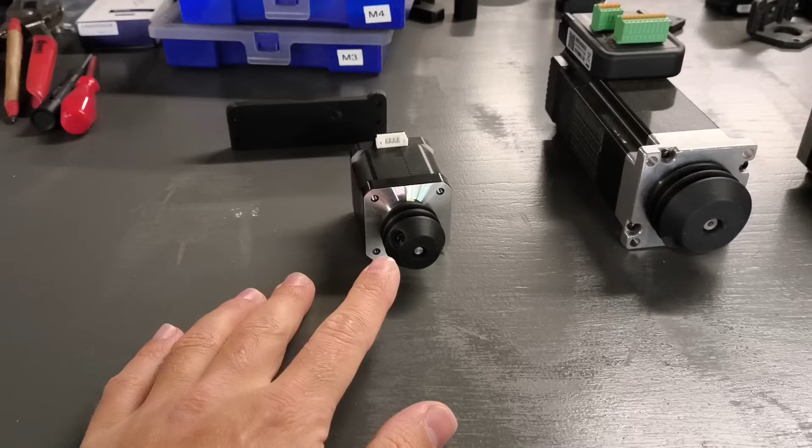This is what we started out with. It's a NEMA 17 with a 25mm effective diameter pulley on it. This is a NEMA 23 style servo in this case because the stepper motors are put on the machine with a 40mm pulley. And what we found out in the latest episode is that those weren't really scaling with the current I put on there. The reachable amount of acceleration wasn't going up linearly when I increased the current.

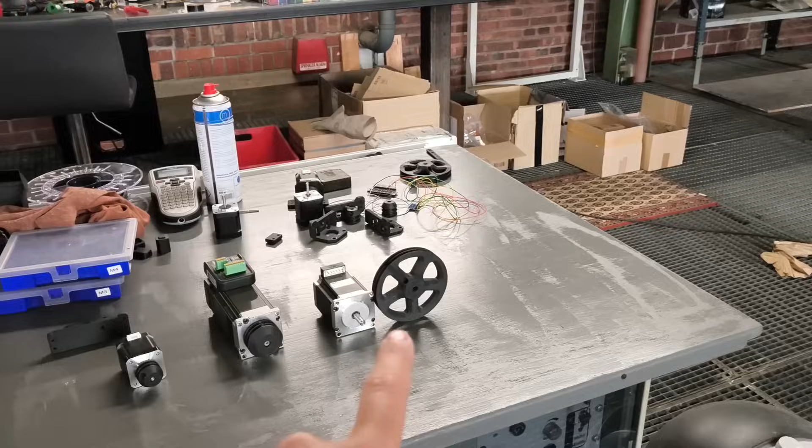So today we're doing the natural thing, and as loads of people suggested in the comments, we're putting on bigger diameter pulleys. This is a 100mm pulley, and on the machine I already have the 120mm and the 80mm version on here. We're going to run some tests with all of these, have this one as an intermediate step to put on there. And then, right now, we're running the OMC steppers.

It's upside down, but you can see if this is of any interest to you. 3 Newton meters, 4.2 amps, NEMA 23 style steppers.

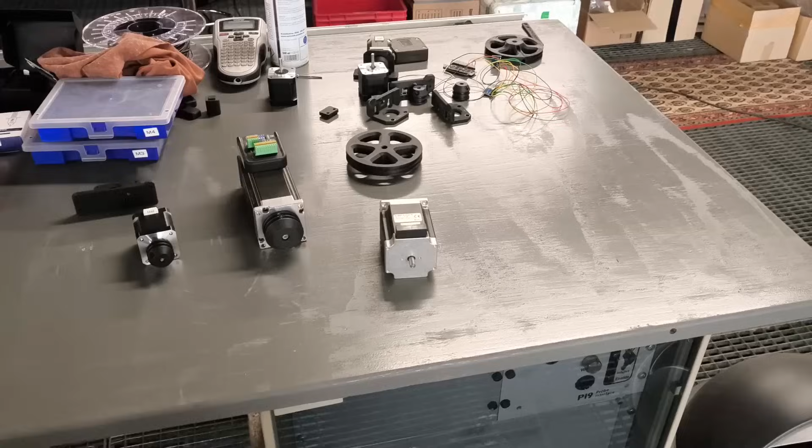Today, we're also having a look at a different motor. This is something a company from Munich sent me. It is also a NEMA 23 stepper motor that can also handle 4.2 amps and also has around 3 Newton meters of holding torque. We're gonna have a closer look at what makes this so special and gonna throw it on the machine and see if this enables us to reach our limits.

So I guess it's time to play the intro tape and then get straight into testing maximum accelerations on all these different setups. So let's go.

Alright, we're on the Minuteman machine and we're gonna do some testing now. Essentially what we're trying to find out is the maximum reachable acceleration per given current on the coils. This is just doing a straight line movement back and forth like 5 times at 1500 millimeters per second printing speed, and with each step it's going to increase the acceleration by 10k. I think the maximum I've set up here is 600k, and let's hope we have to dial that up today.

I set up this crude looking table here and we're going to fill in some blanks. This is like the 80mm pulley, and I think 4 amps per motor is what my current supply is capable of doing. Let's start with the 120mm, I guess, and the test is gonna look like this.

Hit cycle start. 10k, 20k, 30k. This is 1 amp per phase.

And as you can see, it did the 100k, so I have to go to the next step file. I'm gonna cut these tests because there will be loads of missed steps, etc., and me setting up everything again. Let's get back to the graphs, and maybe I put in some of the highest value movements I can achieve. So see you again in a minute.

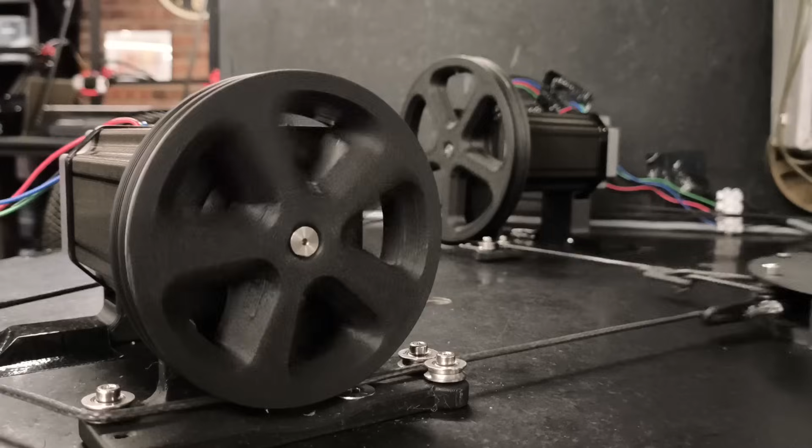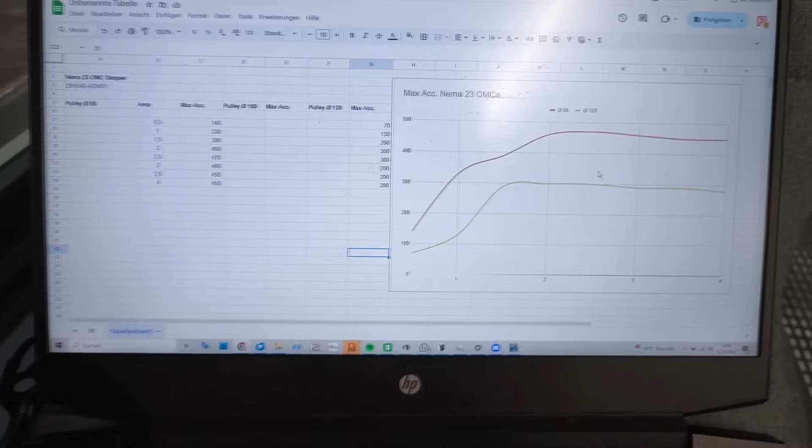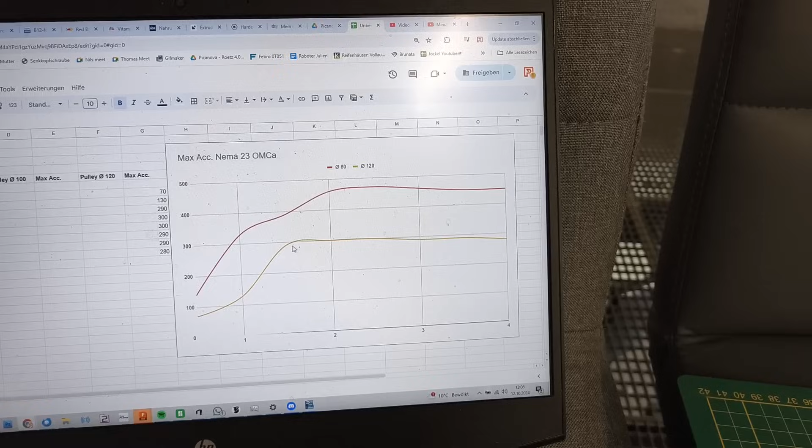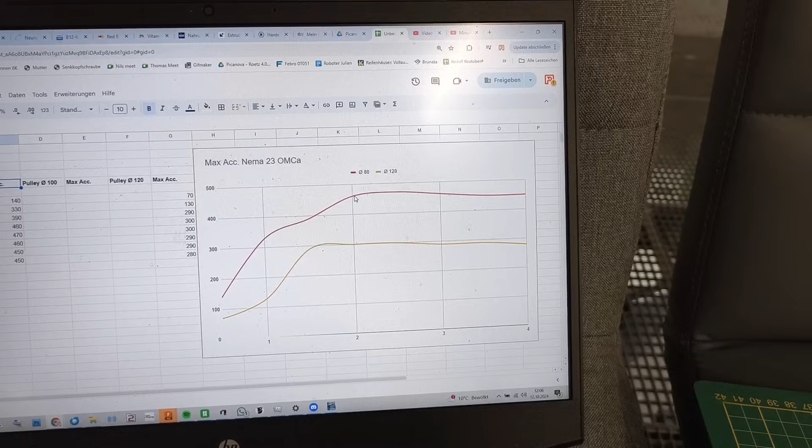So we got some first results in. These are the values I could find, these are the corresponding amperages, and these are the maximum accelerations. As you can see here, that's quite interesting. The 80mm is on top, and you can see in both versions that it is somewhat climbing linearly to a certain point. With the 80mm pulley, that's around 2 amps, and with the 120mm, it's somewhere around 1.5 amps. I can reach accelerations of like 300k, or in this case 470k. Then from this point on, it's just slightly dropping off.

So this is kind of the same as the results I got the last time when we ran the initial 40mm pulleys. We got the maximum acceleration at like 1 amp, and from this point on it was just getting wilder in terms of stress put into the system, but it actually didn't increase our maximum acceleration.

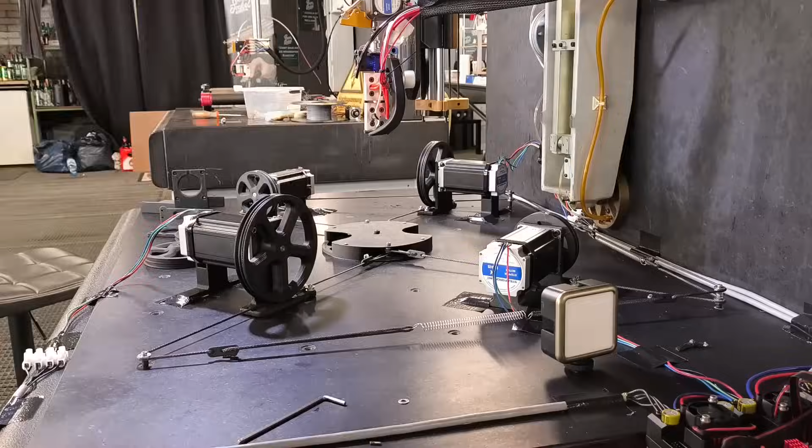That took me way longer than I thought it would, but yeah, I got some results for the 100mm diameter pulley. There's so many little things to dial in before I can actually do testing with proper results.

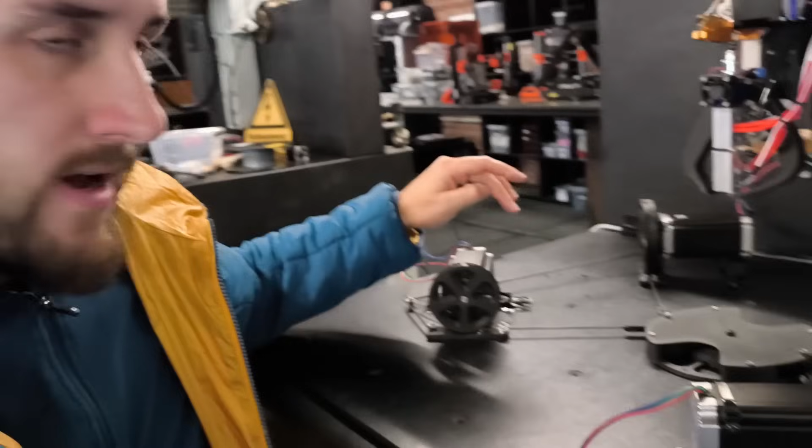In this particular case, I realized that this motor is bad. If I would care to know, I would slice this open and see what the problem is. Maybe it has got something to do with the load on these bearings. Maybe these guys aren't really designed to do this kind of task without having a proper secondary bearing up here.

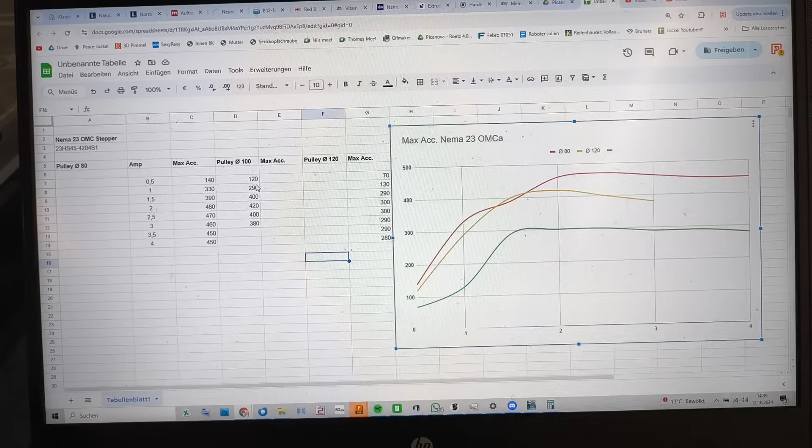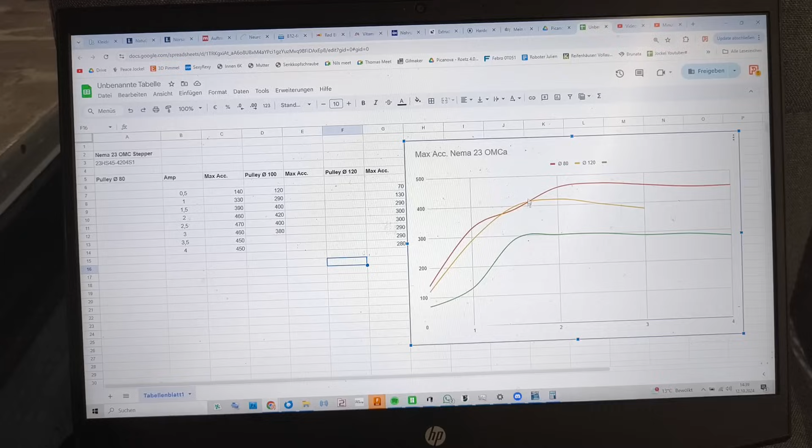I try to keep everything else consistent in terms of microstepping, cable length, rotation diameter, etc. No other parameter is changed except for the amperage. As you can see, up to this point it's pretty much on par, and then it settles in and also tapers off a bit at the end, like we see with all the other pulley sizes. So our sweet spot seems to be somewhere in the neighborhood of 1.5 amps of current.

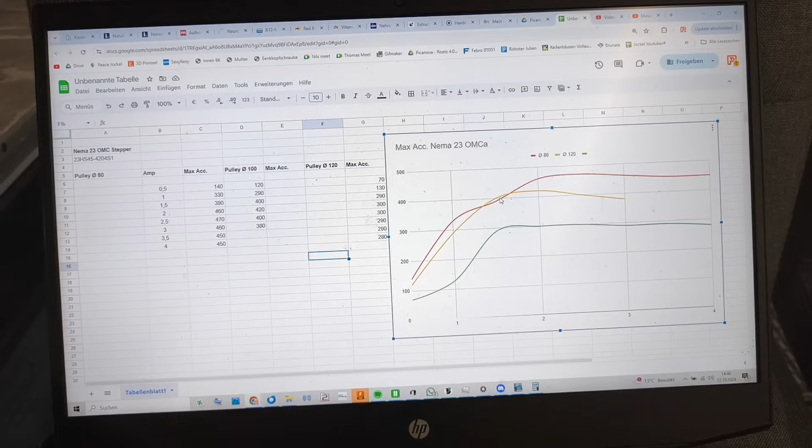The 80mm diameter gave us the best results. That's kind of interesting. I wasn't really expecting that when I did some simulations on here.

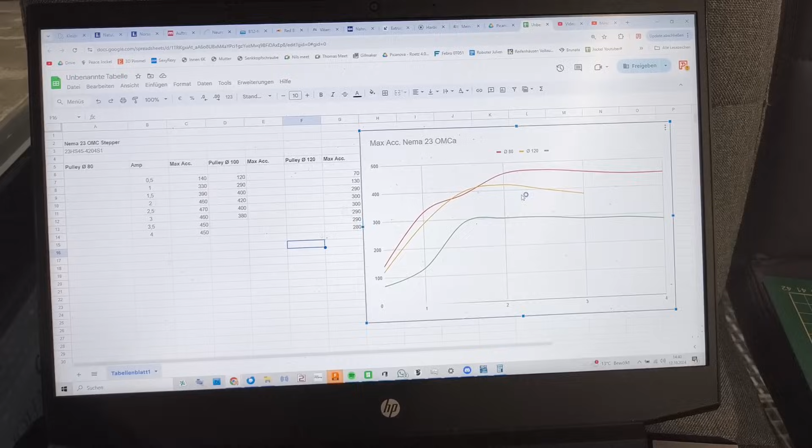But for now, I think it's time to have a look at a different motor, because these OMCs were great for first testing purposes. They were really easy to obtain, I had just 2 days of delivery time, and they were dirt cheap - 25 euros a piece. It got me started in finding out if NEMA 23 is the right form factor for this machine.

At the end of the last video, I also gave a shout out to anyone knowing a company or technology using stepper motors that would help us reach our goals. A guy named Andre called me up and said he is working on a quite similar project, and I think you will see that in some future episodes. We're not clear on the details, but he gave me the name of a company here in Munich called Nanotec. I wrote them an email and asked about doing a collaboration on this project.

They sent me some top-of-the-line stepper motors. We had a quick call about what they expect the results to be. They won't guarantee any value or something, but they were pretty interested in finding out how they compare to the OMC stepper. Let's put some values together and see you in a minute.

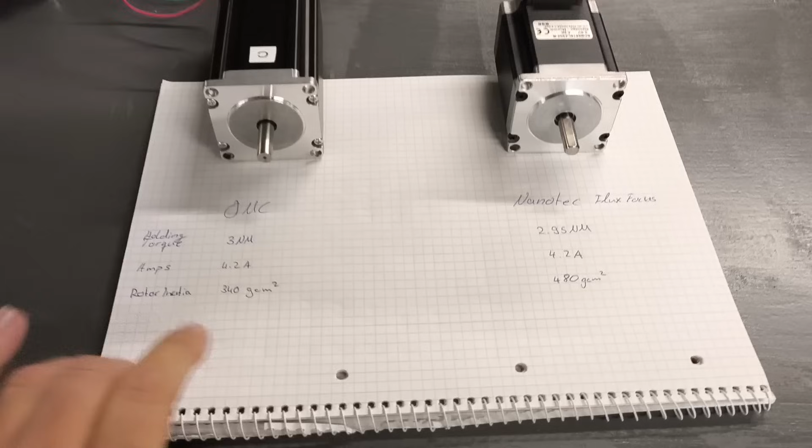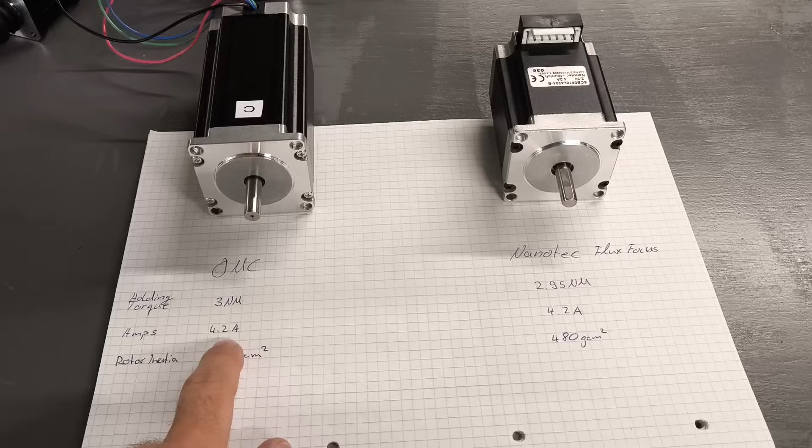So I got the 2 motors lined up on the bench here, and let's just compare 3 little key facts. Both are rated at around 3 Newton meters of holding torque, and they each can handle 4.2 amps of rated current. The rotor inertias are lower on the OMC one.

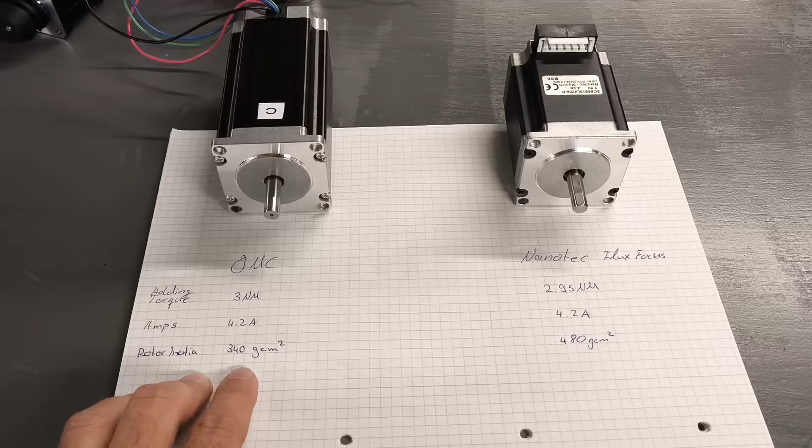Which is usually the better thing for us, because it would allow us to gain more acceleration with less torque. That's 340 grams. The Nanotec is at around 480 grams.

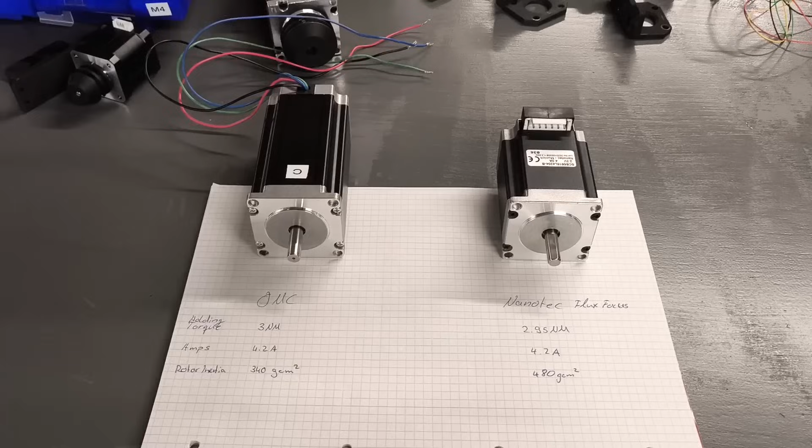So without going into any further details on the spec sheets, this is their top-of-the-line stepper motor with FluxFocus technology. What I can give you, somewhere in the video description there will be a link to the website where you can get all the additional details about this.

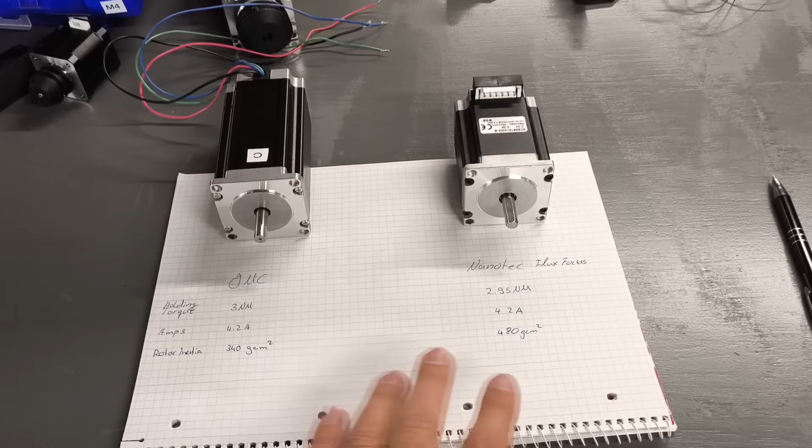It basically boils down to this being a very efficient stepper. As my understanding of it is, they have additional permanent magnets sitting on the teeth of the stator, and that allows them to get the maximum out of every amp of current they throw at it. That makes them really efficient in terms of torque.

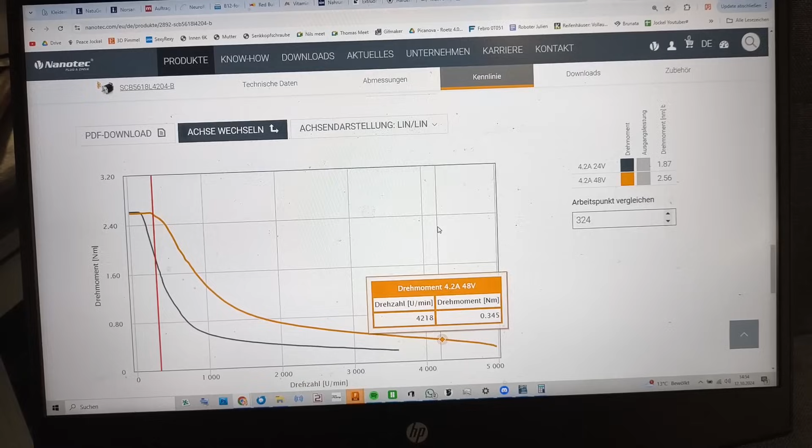So these are the torque curves in relation to the speed. You can see the blue line is at 24 volts and this is at 48 volts. So basically you have to extrapolate a bit to get up to like 57 volts, which I'm running them at right now.

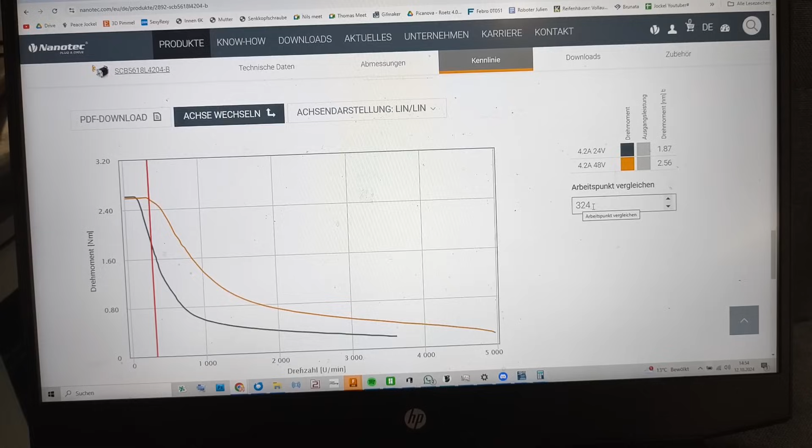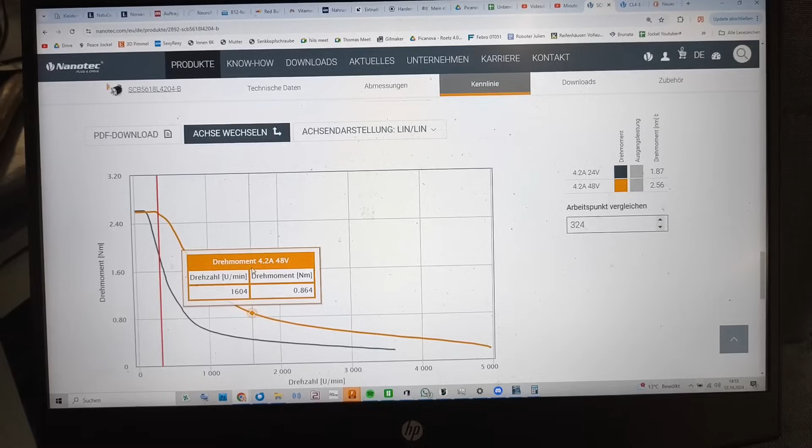With the pulley size of 80 millimeters at 1500 millimeters per second printing speed, it's right about this 325 RPM we're using them at. Yeah, and judging by their document, this stepper should have full torque available at our rated speed.

We'll see what all this black magic in here does in terms of reachable accelerations. Let me slap all four of them on the machine. Then we have one axis with an 80 millimeter pulley and one with the 100 millimeter pulley. Let's see if those numbers add up with the OMC steppers, and then we'll make a decision on what the final pulley diameter will be, and do a test run afterwards to see how that translates into benchy times. Let's go.

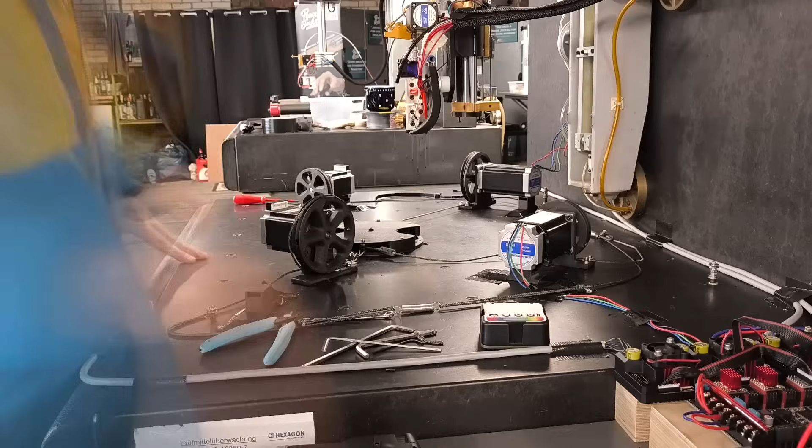I got the Nanotec motors installed, 80 millimeter, 100 millimeter diameter pulley. One thing I forgot to mention, though it was pretty obvious: those motors, even though they're rated kind of the same, are considerably smaller. This is a 76 millimeter length, while the OMCs are about 110 mil in length. Also, they're equipped with a dual shaft sticking out at both ends, because usually this is equipped with an encoder, used in closed loop applications.

Alright, so let's run the same tests. I'll put a snippet of somewhere in the middle, and then we'll see the results. So this is with the Nanotec motors running at 2.5 amps right now on the y-axis with the 80 millimeter pulley, and this is the sweep from 400 to 500k accelerations.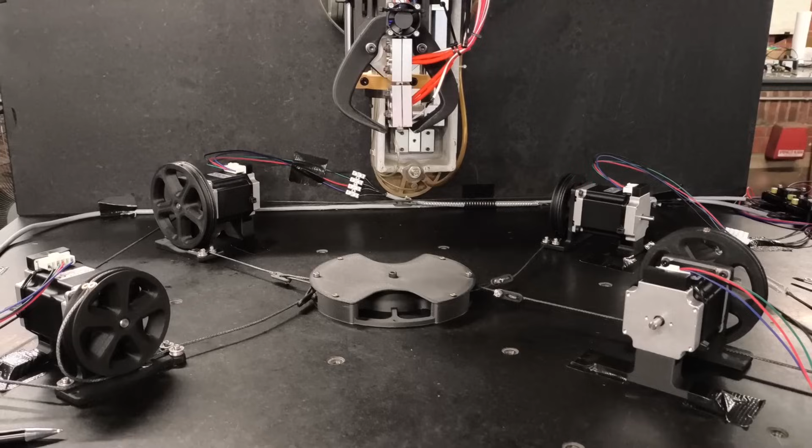Okay, let's just continue. 500k start. 520k it did successfully. Alright, we're back at my screen.

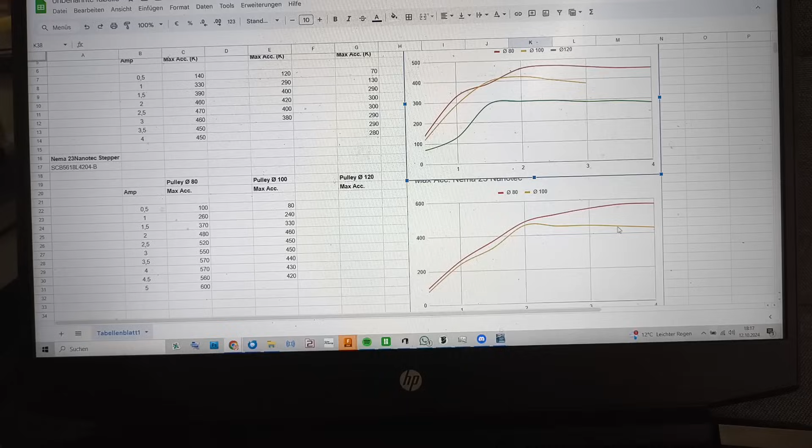So here are the results without further ado. As you can see, the red line represents the 80 millimeter, the yellow line the 100 millimeter pulley. This is a bit different than what we had before, because you can see it isn't flattening out and then decreasing. In the case of the 80 millimeter pulley, it's still able to increase its performance with added current. With the 100 millimeter pulley, it's doing the exact same behavior.

It's been a pretty long day. I've been here for 8 hours fiddling around with this machine, and I'm pretty tired for today. So I think I'm just going to leave it as is, get the CAD work done for the 60mm version, put it on the printer, and see when I get the next time slot available for working here.

Different day, same topic, so follow me to the machine. So what you can see here is I've upgraded the x-axis in this case to the bespoke 60mm diameter pulley, and I've been conducting some tests, and those were pretty interesting.

So again, screen share. You can see the green line up here is climbing and climbing and climbing, and it got to 3.5 amps. I ran these tests 3 times, and it was just shy of 900k acceleration values. Also, these tests turned out to be pretty consistent. I did all of them 3 times and it was pretty much spot on.

So you think, hey, why don't you keep on doing it? The thing is, I can't even reproduce the 3.5 amps. That's quite interesting, because either the motors are quite hot right now, so I have to cool them down for a minute and see if that changes their performance, or if it's something else. I've been keeping all the other parameters the same throughout the whole test, as I said before.

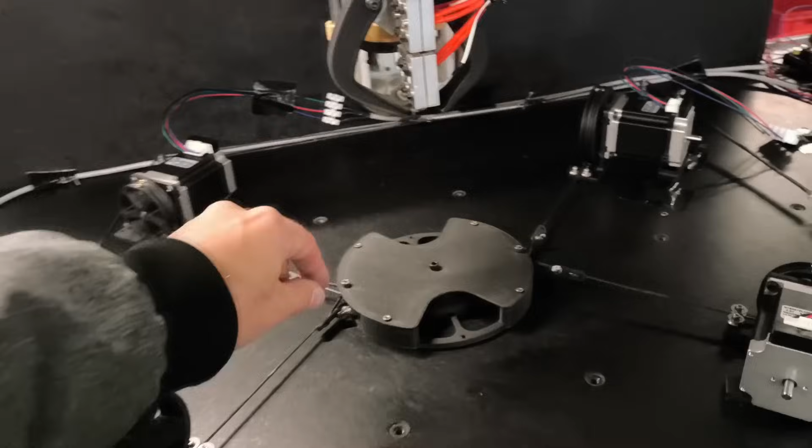Let me start differently. If I install a new set of pulleys, etc., I enable these stepper motors to find their natural position where they like to sit, between 2 full steps. Then I set this on my center, tightening these ropes, so in its natural stepper position these will be slack free. I'm securing them with these screws.

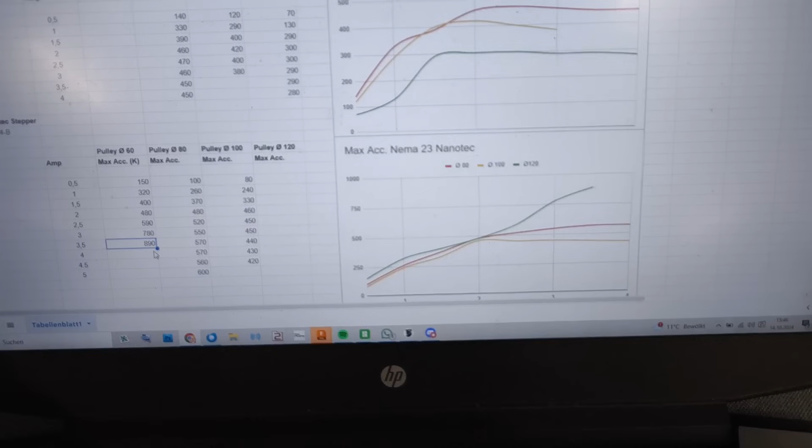Accelerating up to 900k, I noticed that the slack is growing, so there are 2 options: either this tension system is slipping, or it's slipping up here on the screw. Nevertheless, I do have a little bit of play in this system, and that was helping with possible accelerations big time. In order to reproduce this, I kept going back and forth with loosening and tightening all of these, and I can't really seem to find a very good sweet spot. But as I said before, I've run this multiple times, and I know I'm not fooling myself with these values, so it is possible - I just have to find a way to do it reliably.

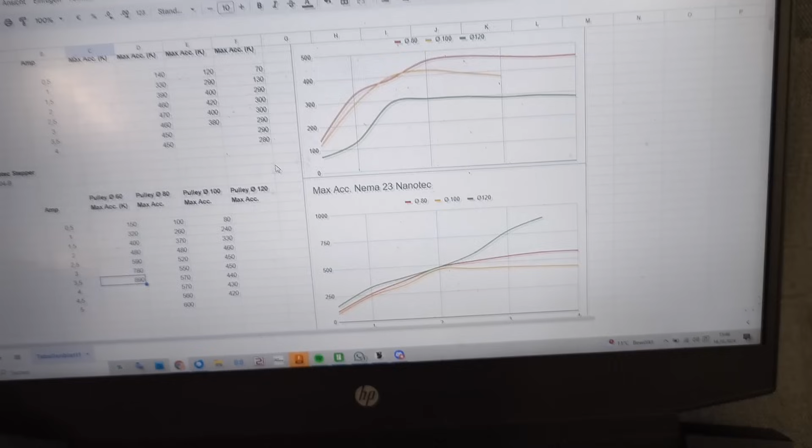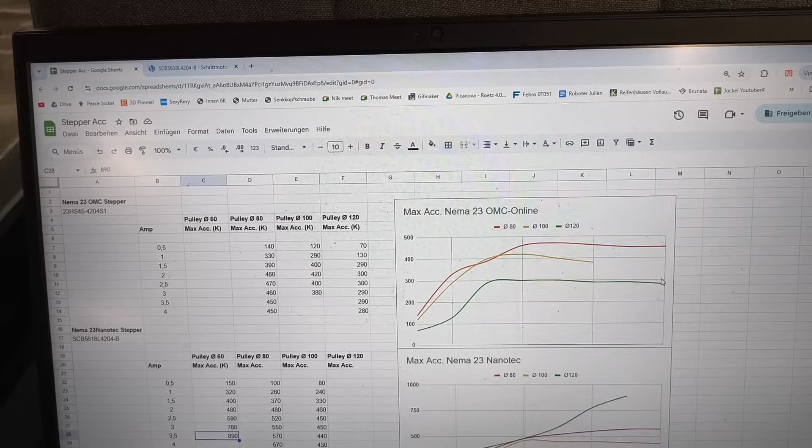So also, what you're going to see with these steppers is completely different to the OMC ones or even the LDOs I had before. With a bigger size pulley, the performance did decrease. And also what I found is that this point of saturation, where more amps doesn't translate to more acceleration, is becoming sooner and sooner.

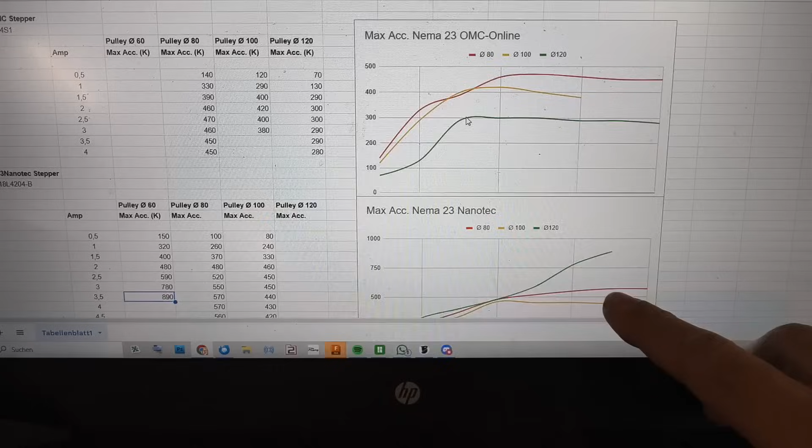That's a behavior I can't really find documented. There's a bit of saturation, but it still keeps climbing just a tiny bit, and the lower I go on the pulley size, the more climbing it does, linearly.

Somewhere in my pile of pulley diameters, this one is just a third of it. I do have the old 40mm pulleys, which I'm going to put on the y-axis now and see where our limits are. A few hours later, I rebuilt this again with the older 40mm pulleys.

I'm at the point where it starts to get really interesting. I've been doing these measurements again for a straight single axis move, and these are on par with the 60mm pulley. Then I did the next test, and at 2 amps it was somewhere around 480, which was as expected with the 60mm. But then I changed the tension settings just a slight bit, and I still got the same result on the same settings.

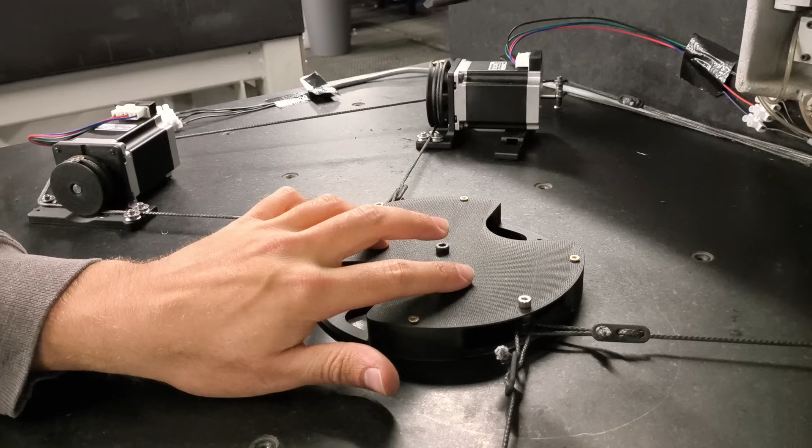I'm gonna set the camera up here. What I do with these tests is just put my two fingers up here to simulate the effect of the air bearing that will be installed later on. Otherwise it will tip in too much and interfere with my results. And now we're running 410 to 500k on this axis. Starting now.

That was 500k last time. Now we're starting from 510k. Go.

Let's go on, I haven't done this myself. This is the y-axis starting at 610k.

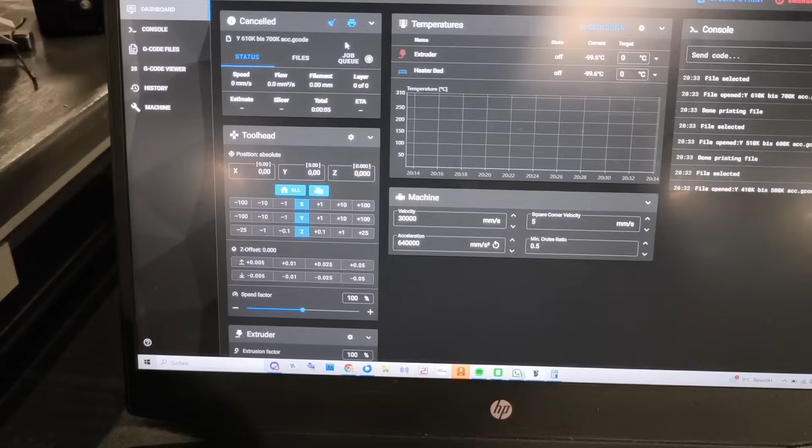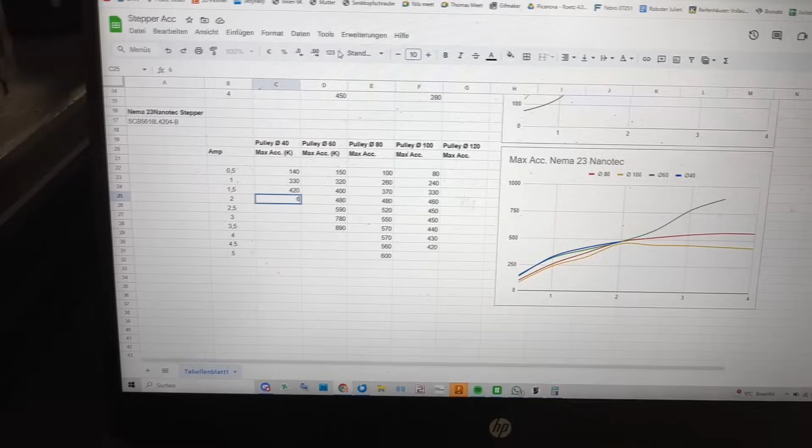So just to prove to you that I'm not making this up, this is being set by the G-code. It actually did 630 — well, 620k was successful at just 2 amps. Let me put that in here and let's continue.

I think what this goes to show is that this system's capabilities are way up here. It takes some time to figure out all the nitty-gritty details on what I've got to do. And to be truly honest, I have no idea if I rerun these tests now where I'd end up.

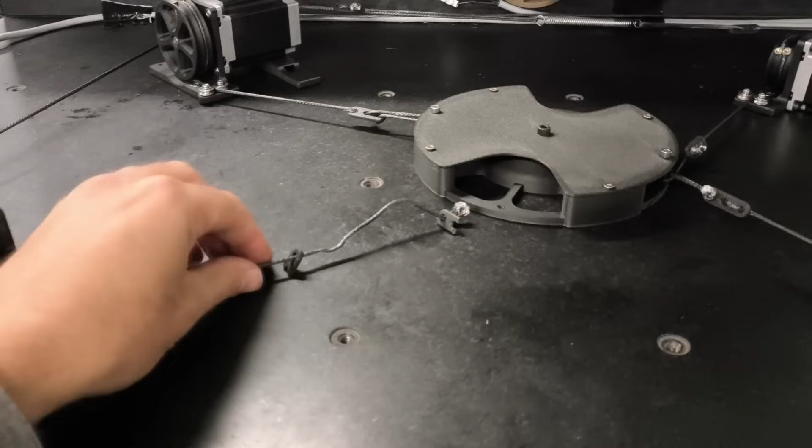The slightest variables in this case, like cable tension, make all the difference. So I have to find a way to either measure that in terms of frequency or have a force sensor or something like that in the line. With the open loop steppers, I have very limited resources in terms of data from the motor itself. So let me check — literally two minutes later, when you just thought you had found the real sweet spot.

These measurements are driving me nuts, and part of it is because it's not reliable, or let's say not repeatable in its results. I've been fiddling around, as I said in the last clip, with belt tension or cable tension. I can reach really high values, but I can't reproduce them reliably.

That is a problem because there are so many things on this machine that have to line up in a later attempt to actually 3D print something. We end up in a situation where just one of a hundred attempts will be successful, and that is not a reliable base I want to have.

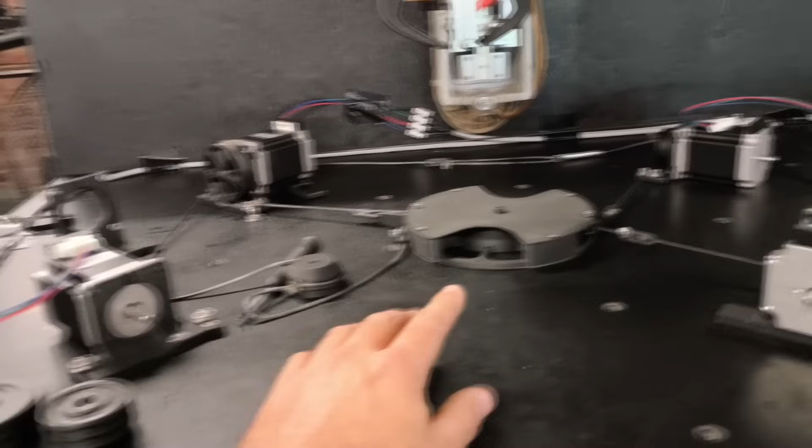I tried to get a few variables out of the system, and that is by using these parts. What I'm trying to do here is get valuable data from one of these motors only, by simulating the weight of this moving bed here in the middle. We're in a situation where because we're using cables instead of something properly rigid in both push and pull directions, if we move along this axis only one motor is active and it has to do all the acceleration, so it's pretty easy to calculate the momentum it puts on the motor.

So what we're doing now is conducting at least four tests. I figured that these motors are way ahead of the OMC steppers, so we're going to stick with them for now. Also, I've concluded that bigger size pulleys don't help these motors — I'm somewhere in the neighborhood of 40 to 60 millimeter diameter pulley, which works best with these motors. That's where I get the best results, so we're gonna stick to those.

What we do now — this is like a blank pulley, just like the others, with just these two lips on it — and we're gonna stick it on here.

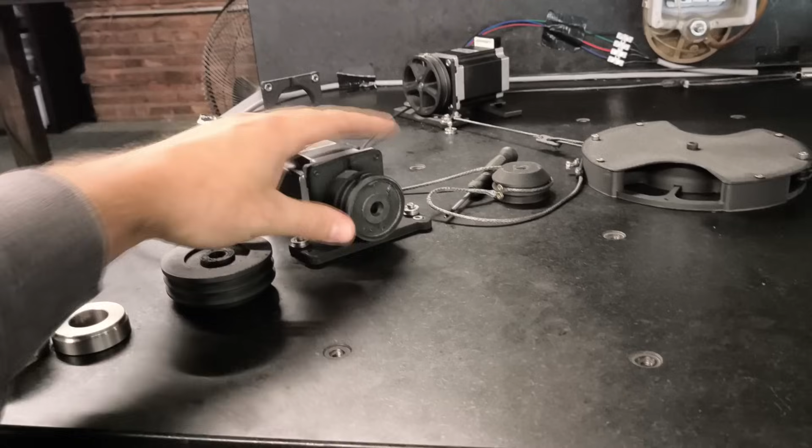What we're trying to find out is what if this motor would run without any additional weight on it, what is the absolute limit this motor can do in terms of acceleration. That will tell us where the true limits are if we shave off gram after gram from this moving build plate, and it would be our main priority to get this as close as possible to non-existent.

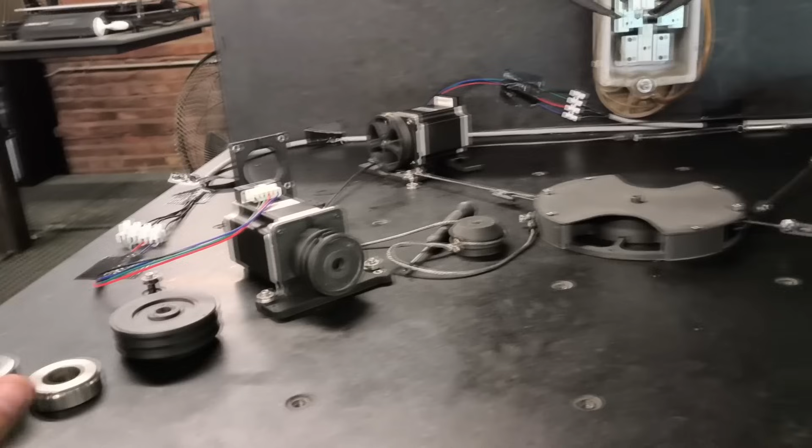Next we're going to add rotational mass, carefully calculated to match whatever we got in the middle right now. This is 85 grams, and this piece I can glue in here later will simulate the inertia of this in linear movement, having it here as rotational inertia. My hope is to conclude from this test how much potential acceleration is being lost because of the strings - everything from cable tension to harmonics to frequencies will be put out of the system. So it will tell us, with this weight attached, the maximum acceleration without having these ropes on here.

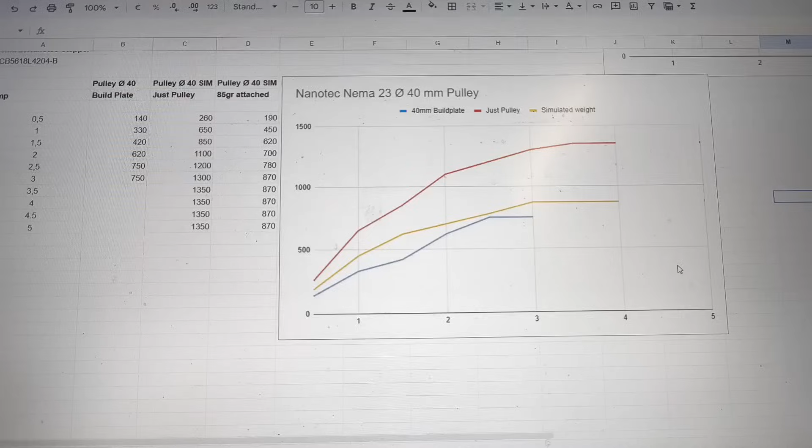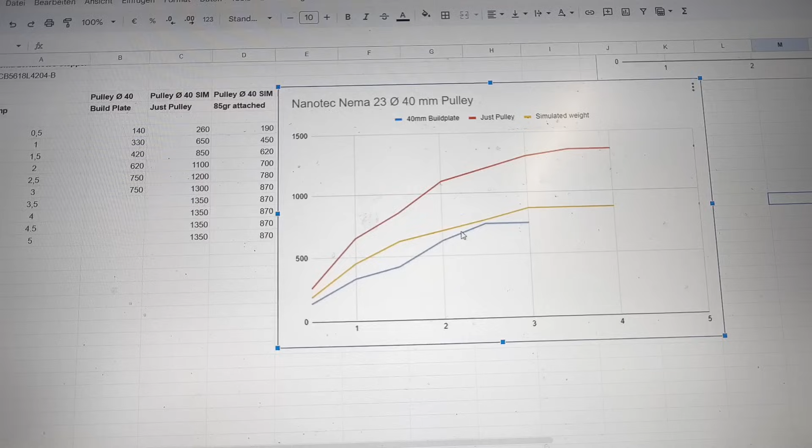The first set of tests is done. As you can see, this is for the Nanotec diameter 40 pulley. The red line is just the pulley, the yellow one is simulated weight, and this is the previous data set from when I was doing the tests with the build plate attached. This yields some pretty interesting as well as inconsistent results.

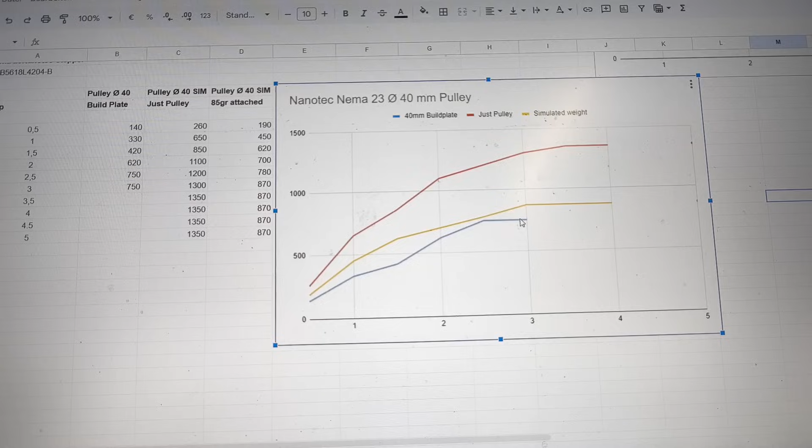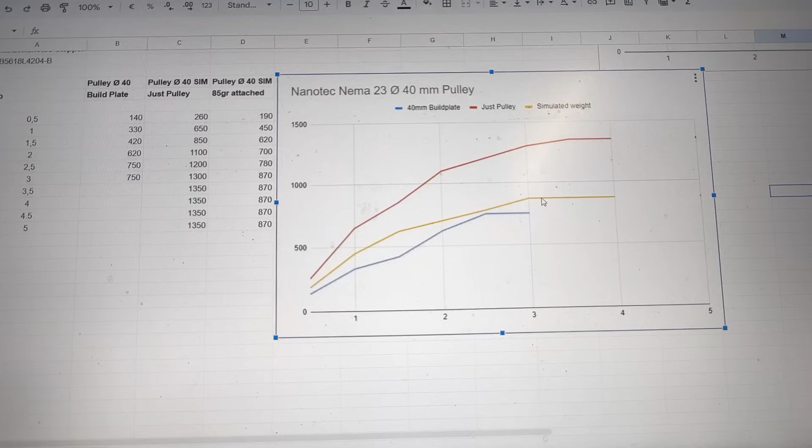The red line represents what this motor standalone is capable of. With this diameter pulley, we will never exceed 1.35 million millimeters per second squared acceleration. This tops out no matter how many amps I throw at it. The yellow line represents the influence of the added weight from the build plate - just by adding these 85 grams on top of the pulley, we lose this amount of possible acceleration, and it tops out at around 870K.

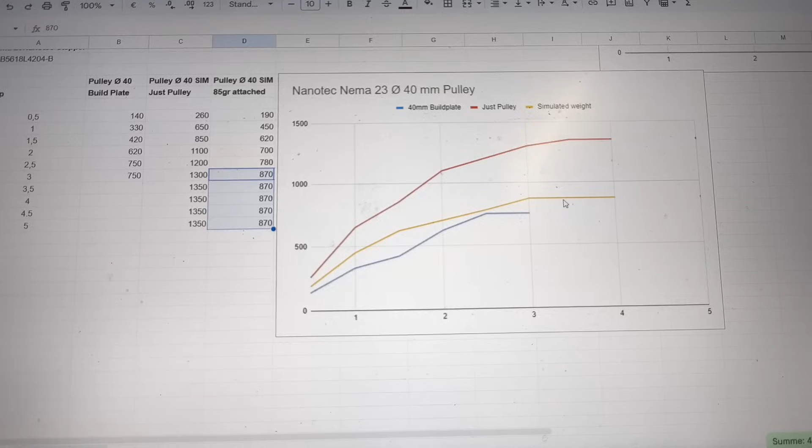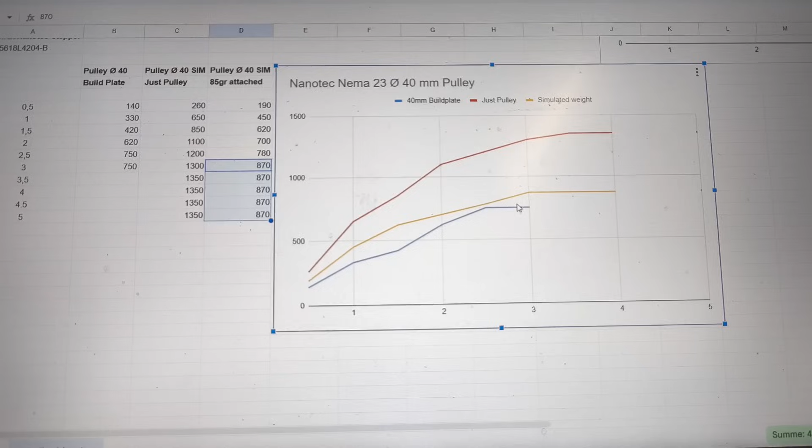With this current iteration, this will be our limit, we can't exceed this. With the blue line, I think that's pretty interesting because at a few points we almost match that - right at this point the influence of our cable was basically non-existent, as well as maybe here, and it's slowly approaching this point. So the yellow line is what's possible with this weight, and everything between these two lines is basically what we're losing due to the cables and tension.

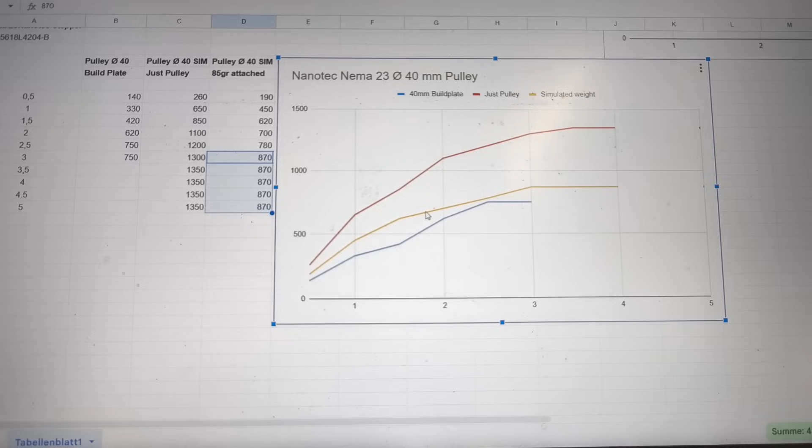Let me conduct the tests with the 60mm pulley and then draw a conclusion. I took a different motor because it's cold and they got the same conditions, and this is the 60mm pulley at 3 amps. I think it failed at 1.85 million millimeters per second squared acceleration.

Alright, let's talk about the results here. The 40mm one you saw early on, we already discussed that. This is for the 60mm pulley, and as expected, the red line with just the pulley is way up higher, because that makes total sense - the weight of the pulley itself doesn't really change much, just a few grams difference, but it has to move way less. So with just the pulley attached to the motor, we can run up to 1900 meters per second squared.

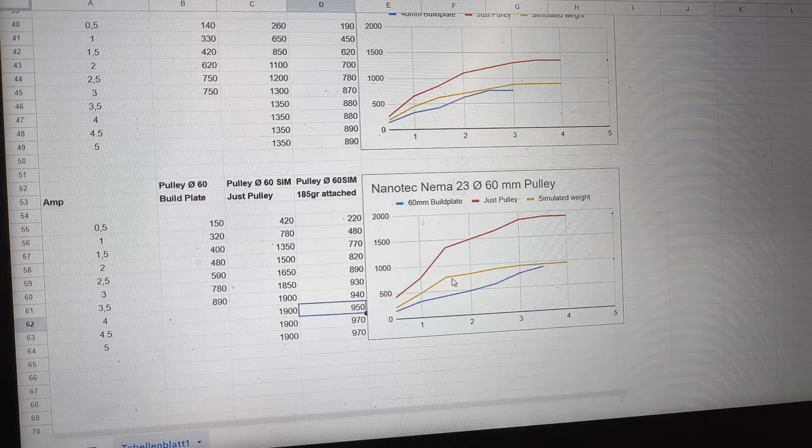With the simulated weight attached, we are in a similar neighborhood to the 40 millimeters, maybe 10% higher on average. But the blue line, the actual measurements with everything attached, has a way higher gap between what's possible and what was achieved in reality. Therefore, I'm going to conclude to go with the 40mm pulleys for now, because either way we need to increase this way more to eventually get down to a 1-minute benchy, and it won't be possible with both of these. But this seems to be a bit more of a reliable setup.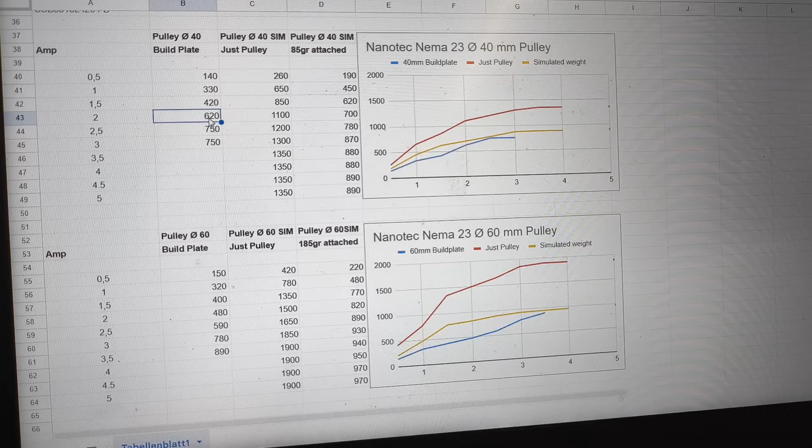If I run these at about 2 amps or somewhere in that neighborhood, that will help tremendously with testing and have a reliable base. With 2 amps on the motors I can pretty much run them all day without getting into any cooling issues, and also have, in a best case scenario, well over 600k of possible acceleration, which is still a freaking lot.

I'm having the feeling this is going to be a long video again, but I just want to take this moment to address something about engineering itself. We're doing a lot of base work to get data and derive actions from that. There's this old saying: if you've got an hour to chop down a tree, you better spend 50 minutes sharpening your axe.

And that's exactly what we're doing here. We could just go into printing stuff, shaving down seconds after seconds, but it was very clear early on that this wasn't going to be an easy task, and we have to make smart decisions about our time, otherwise we'll be wasting it. You could argue that doing all these experiments slinging the bed around with the cables attached, before actually simulating the rotor inertia part, could be kind of a wasted time.

But now I've got all these data points available to me, and we can derive a decision from there. In terms of possible benchy times, let's say we take our highest value reached today with the rotor inertia attached, roughly 1 million millimeters per second squared. That's still not far away, but there's still something to do before we can get a sub-1-minute benchy according to the speed benchy rules, which is only steppers.

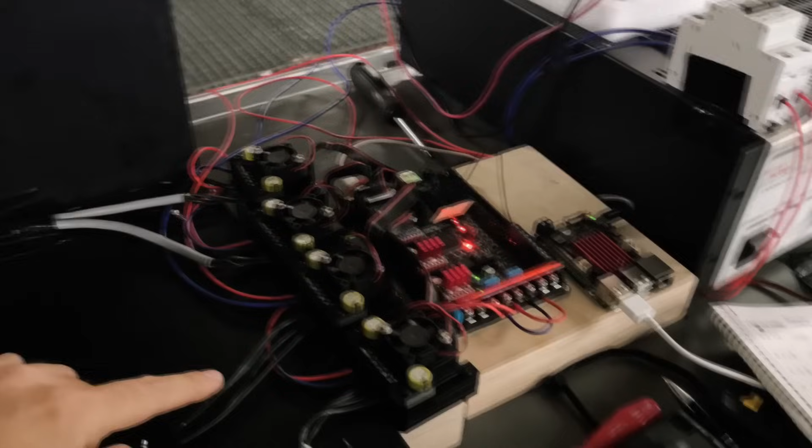And I think it's very clear to say from this point that with these kinds of systems, it's almost impossible. I did say almost, but let's have a look at what we've got here. These are top-of-the-line steppers from a German manufacturer, run with absolutely top-of-the-line stepper drivers, supplied with the maximum voltage that is somehow possible, on the fastest processor that is out there for 3D printing applications.

And even if we add input shaping, which totally isn't a thing up to now, I don't think we're going to reach those values. But that's not a problem. Essentially what we're trying to do here is answer the question, and if it's no, well, then that's okay. So I think there are more and more indicators that it is not possible with off-the-shelf components.

I think what we do now is wrap this up for the time being, putting on the 40mm pulleys, get everything into kind of a final situation for now, and get a reliable moving platform on this machine. Then build the proper hot end that is able to keep up with the current state of it.

I think it's time to have a sneak peek at what's about to come. Let me line that up for a second.

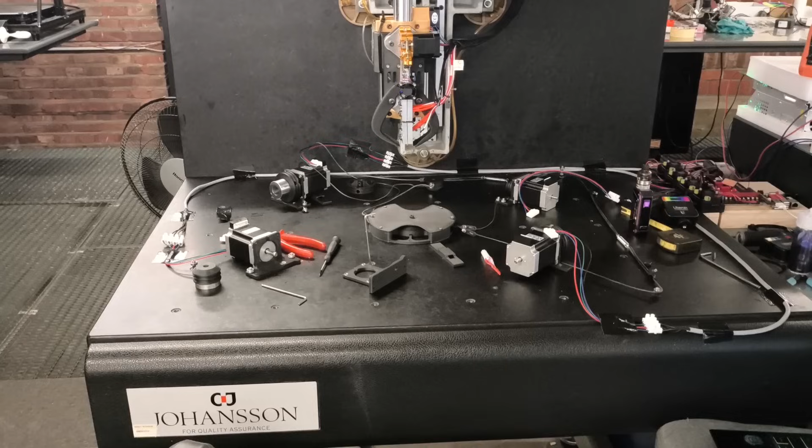Maybe we can go into this in a future episode, but for right now I'm going to build this into a presentable state again, and then let's see if we can run a dry run of a Benchy somewhere in the 2-minute neighborhood. Let's see if I can do that, and we'll meet again soon.

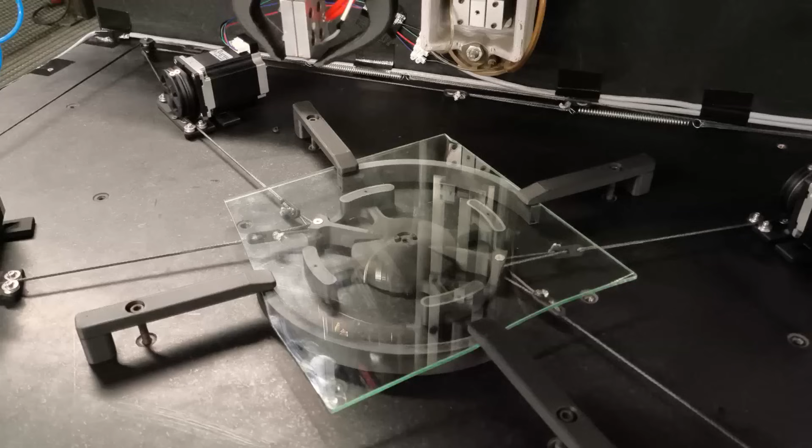Alright, probably the last try for this evening, attempting a 1 minute 57 dry run of a complete Benchy. I don't have a stopwatch here, but you can see it on the slicer, I guess. So here goes nothing.

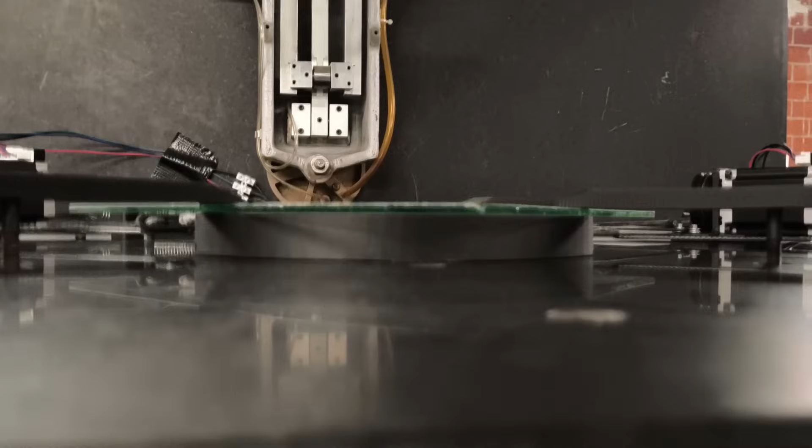Basically, in its current state, it is almost locked. But as soon as shop air is applied, there is a very fine gap to the bottom and top surface, which is this glass plate for right now. I do have proper glass plates lying here, but I lack a water jet and have to get that out to a different company. I just want to do that when I got the final measurements of everything.

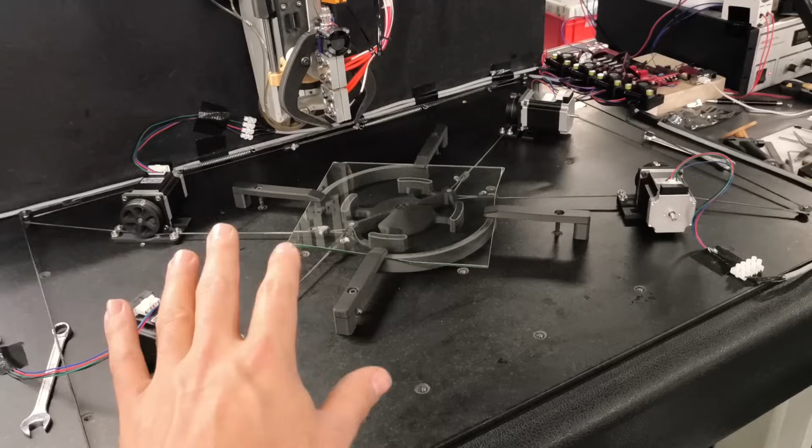In terms of performance, this added a whole lot. You saw me in the test putting my fingers on there to basically lock these tipping degrees of freedom, and this setup prevents that entirely. From the moment I put this on, all the measurements became somewhat reliable again.

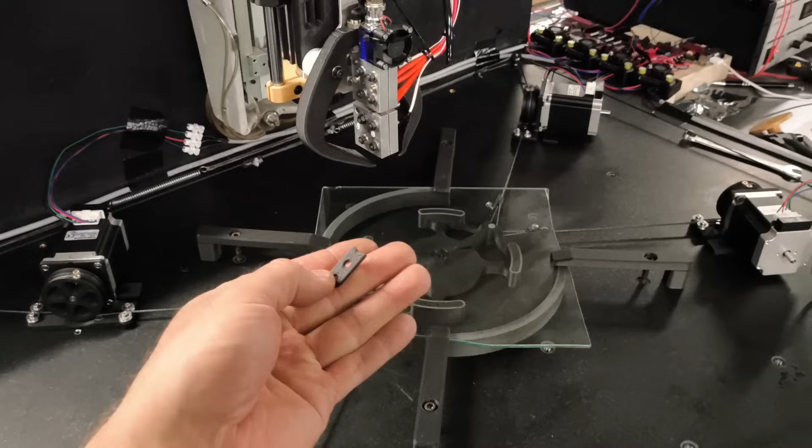This is running pretty darn good, except for these tensioner things, which were breaking in all the previous attempts. I've done 4 this evening and I had 4 of these break.

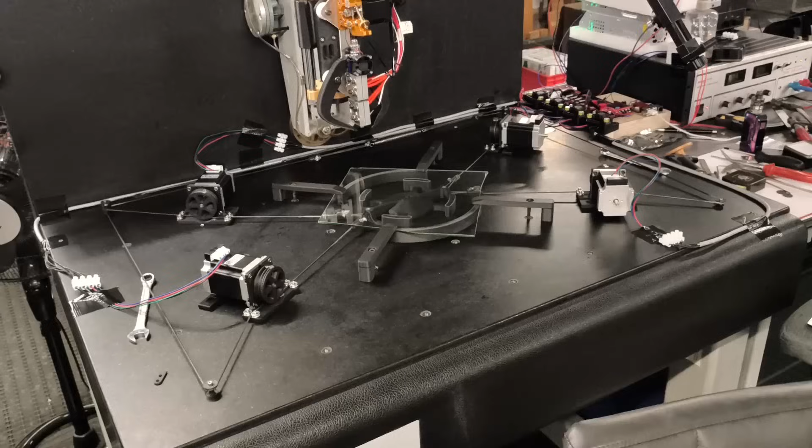To give you some numbers, this was run at 1500 millimeters printing speed and 450k acceleration throughout the whole print, with a square corner velocity of 20 millimeters per second. And still, there is no input shaping on this machine. I think that's one of the next things I'm gonna tackle, to get this a lot less wild in its movement.

Apart from that, I already showed you the pictures of what I got for the hot end in the schedule. So I think these will be the next things you're gonna see here on this channel. As an update, I'm going to close this up for this video.